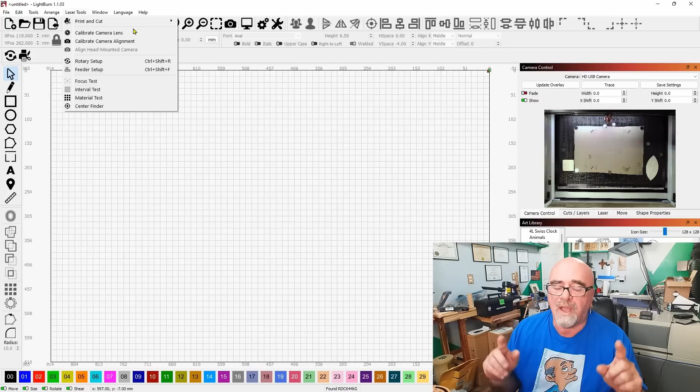So now I've started off by coming over here to Laser Tools and calibrating the camera lens. That was the first thing that I did, was the lens calibration. Now that's the one where I was saying is key. You're going to print out that 8.5 by 11 black dots during this process, and it's key to use a white background.

Make sure your entire bed is covered in white, because I've never had the calibration process for the lens go this smoothly before, where every single number was far below the minimum threshold for Lightburn to recognize it. It was done in maybe 2 minutes, because every time I hit next and capture, it would say perfect, next. I blew right through that.

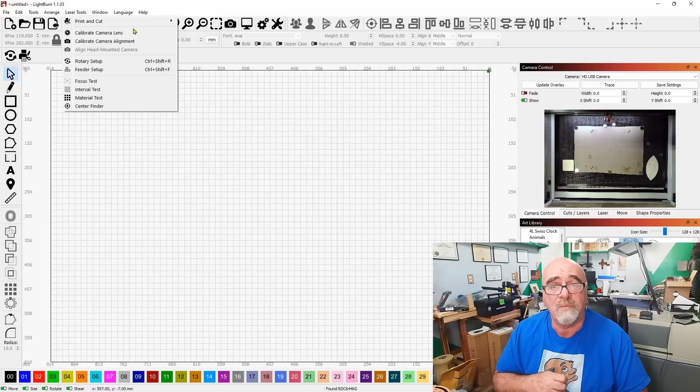That's never happened before. So I'm pretty sure that white background is the key, because I'm using the same camera as I did on my last laser, the 50 watt. I just installed that one into the 80 watt, so I know it's not the camera. And another thing, I don't like the fisheye, so I didn't get the fisheye lens for my camera. You'll see in a minute.

So the second thing that you do is you calibrate the alignment, where you burn the numbers 1, 2, 3, and 4 in the crosshairs, and then you click on the spot in the crosshairs. So that's done too, and you can see by the camera over here that I've already done that 1, 2, 3, 4, and I've done some other testing too, which I'm going to repeat to show you.

And this is where I was so impressed, and what made me decide to make this video is the accuracy. So let's update the overlay.

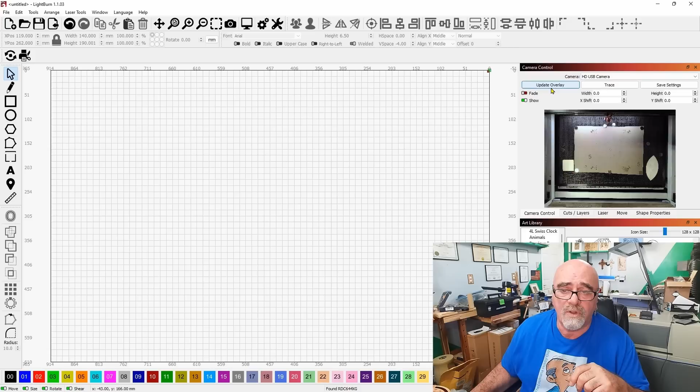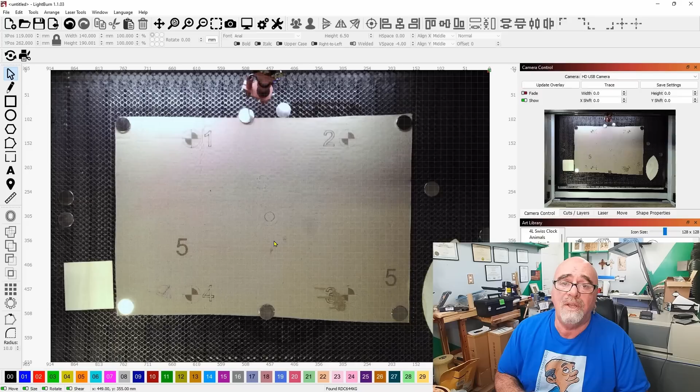Oh, there we go. You'll see on the bed, this is what I printed 1, 2, 3, and 4 at 200% size. I never even saw that option before. This piece of cardboard is 24 by 17, so you can see that's spaced pretty far apart. I think that's probably key here, making a larger image, expanding it out across the workbed.

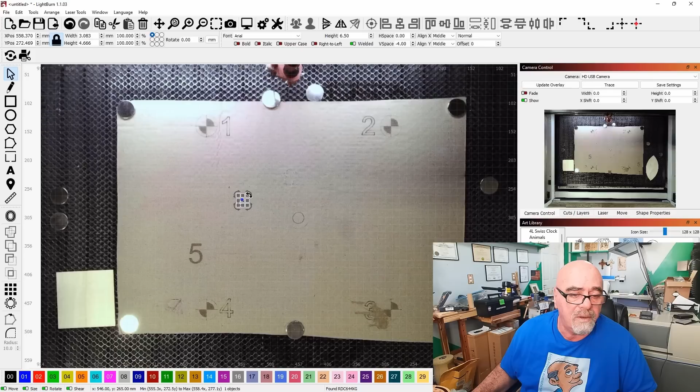So let me show you what I did. I'm going to do it for you live, okay? You see this number 5? That's what I did. I clicked on the screen and typed the number 5. Then we'll just make it a little bigger so we can see it, and I'm going to make this one really big because it can be hard to see.

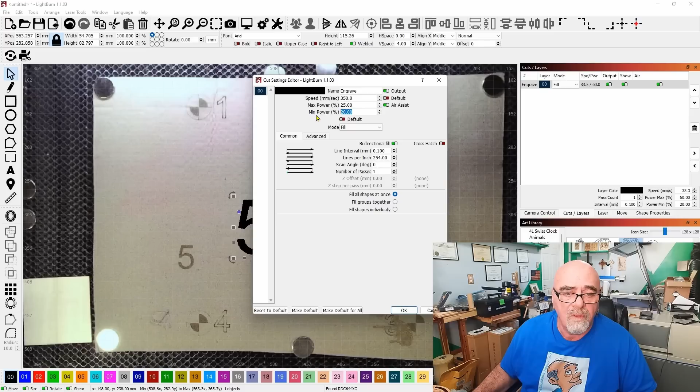Let's put it on the black layer, and let's go ahead and put this into fill mode like that. Let's see, I think we'll go 350 millimeters a second, and we'll put the max power at say 25, and the minimum power at 8. So, there we go, that's all set to go.

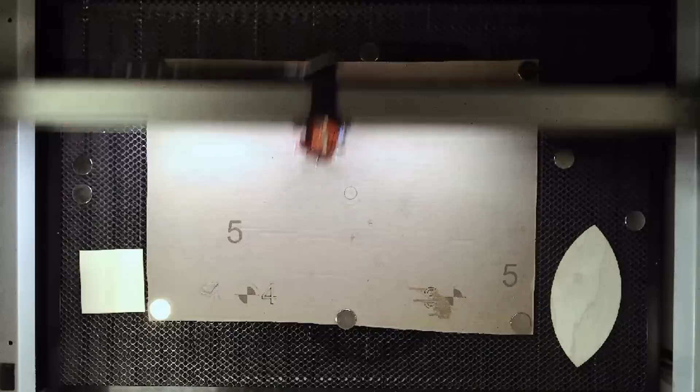Now what I'm going to do is bring this camera out, because this is just an overlay that you see here. I'll make it a little bit bigger like that. I'm going to come to the laser and hit frame, and you can see it's relatively in the spot that I picked, okay?

So let me turn on the laser, and let's go ahead and hit start. I'm going to do this whole thing in live time for you so that you can actually see this. Now when this gets finished, we're going to update the overlay again, and you're going to understand what I'm talking about here. Maybe I shouldn't have made it so big.

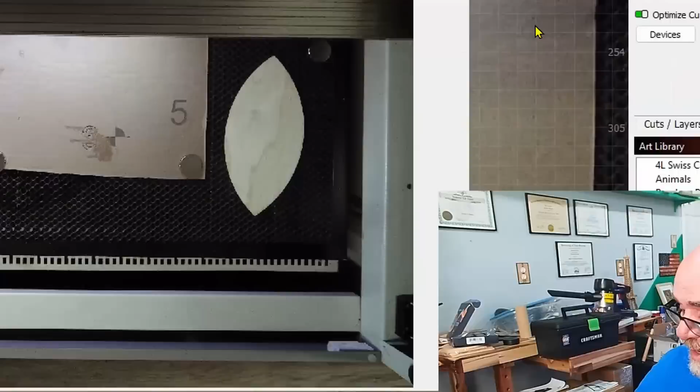Oh, and for those of you that are interested, I did finish the compass, and I don't know if you can see it here, but it came out just beautiful. If you haven't seen the compass video, you should take a look at it, it's awesome. This is four layers thick, it's got pretty heavy, and this is Baltic birch plywood, so it came out awesome. I used a triple coat for the finish, I decided to put a high shine, high gloss finish on it, so I used the triple coat.

And I probably should have made that number smaller, because this will take a little while. I'll tell you what, I'm just going to stay in live time, speed this up, and then come back down to real time.

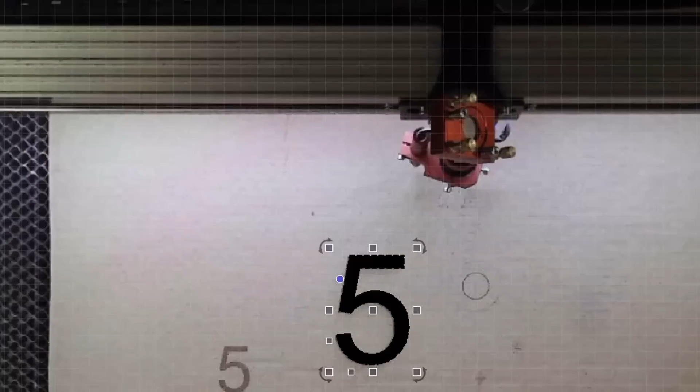Alright, so we're back in real time, and I'm going to move this camera out of the way. What I'm going to do now is update the overlay to get the latest picture of it. And there we go, so now if I zoom in...

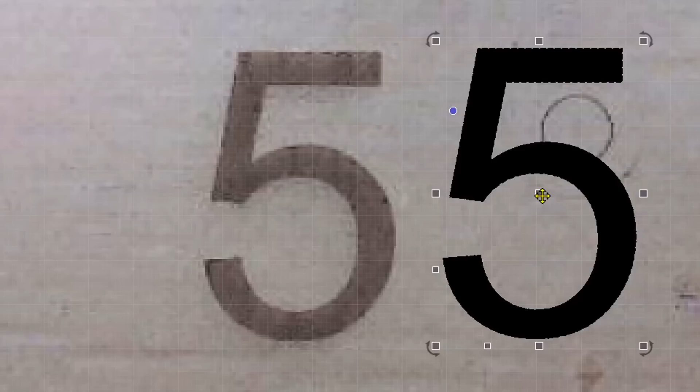Look at that. That number is exactly where I put it. Watch what happens when I pull it off. There's the burn, this is the graphic. There's the burn. Undo that, and you see that it is in the exact spot that I chose. That's pretty incredible, because that's right down to accuracy of about 0.5 millimeter.

So let's take it another step further, and I am going to do something different. Let me go put a piece of material on there and show you a different way.

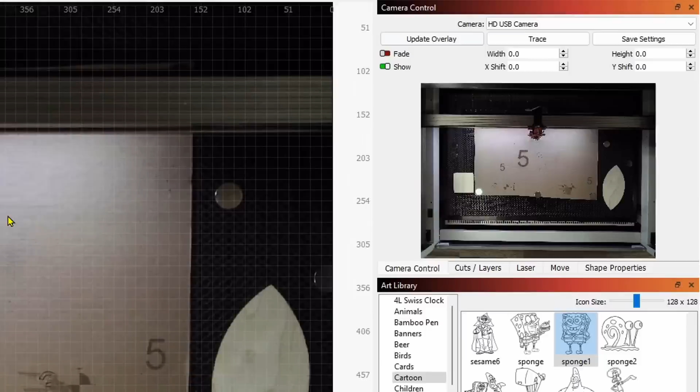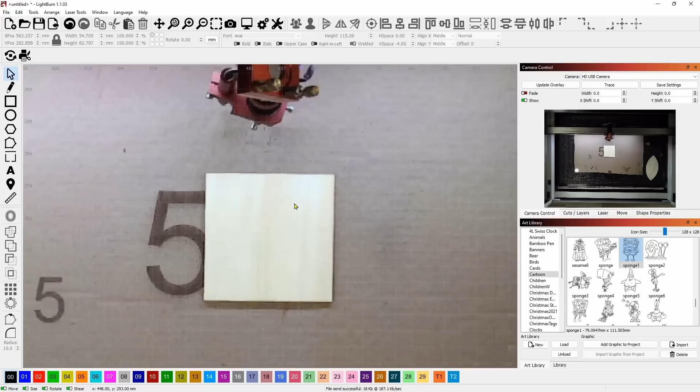Okay, now we've got our material on there. Let's update the overlay again, and you can see it now. Let's zoom way in here, and there's our piece of wood.

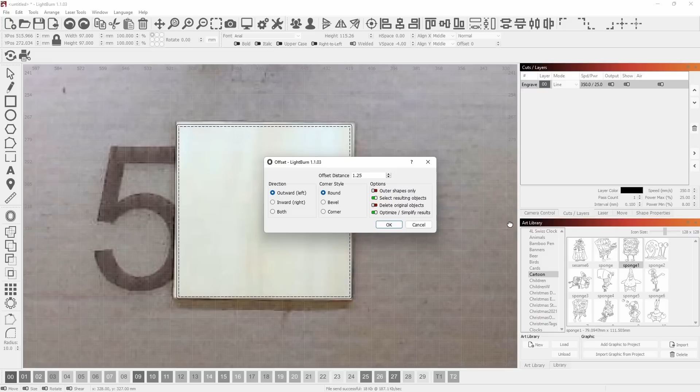Now let's take and draw a rectangle over that piece of wood. Let's put that into line mode, like that. Grab it and try and get it in the right spot, something like that. Let's offset it so that we could see it a little bit better. Say okay, put it into fill. Actually, let's put it into offset fill so it does this quickly.

And it looks a little bit crooked, the wood, so you see I don't have the wood placed perfectly. So let's grab the little handle here and see if we can make it as straight as possible. Oh, I'm only—I gotta grab both of these. Let's just group them. There we go.

All right, let's see how straight we can make this. I think that's pretty straight right there. Let's bring it in just a tad, and it looks a little higher on the top than the bottom. So let's do it this way instead. Let's do that, let's do that. And it needs to tilt just a little bit there. I think that's good like that.

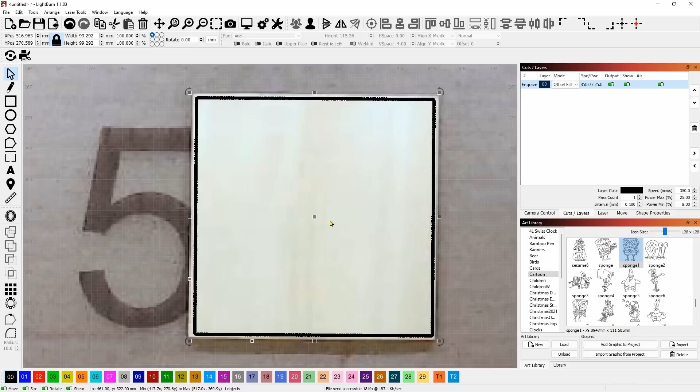So what do you think? That looks pretty darn close if you ask me. All right, let's go offset fill, 350. Yeah, all of that looks okay.

So we're just gonna come to the laser tab and we're gonna hit start. And if we come back, you'll see it running the job. This one should be a lot quicker because we're using the offset fill. That's halfway point—when it reverses direction, you're at the halfway point.

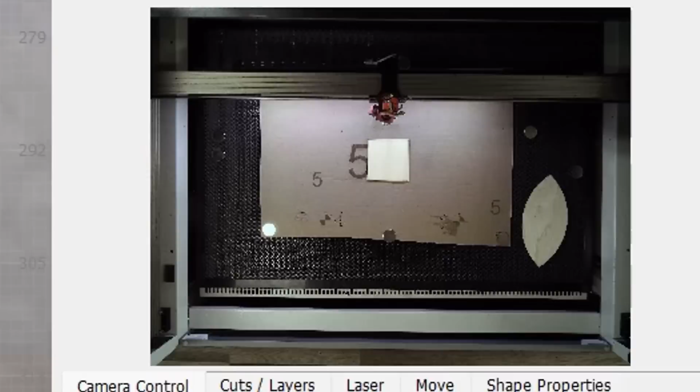This is really great if you're a distance from your laser. So now we'll hit update overlay, and you can see that it's slightly off. Not by much. Let me grab this guy, pull it out of the way. So you see I was slightly off, but we can adjust for that.

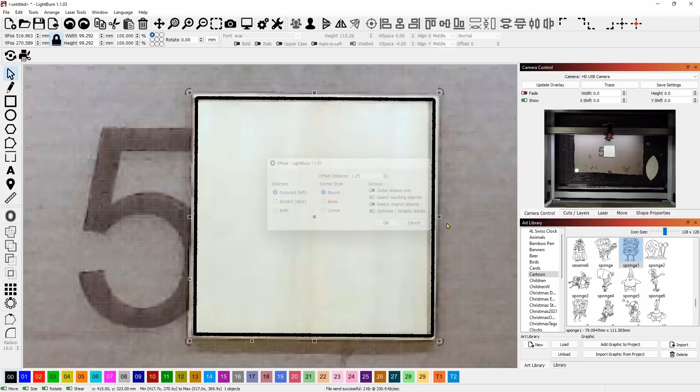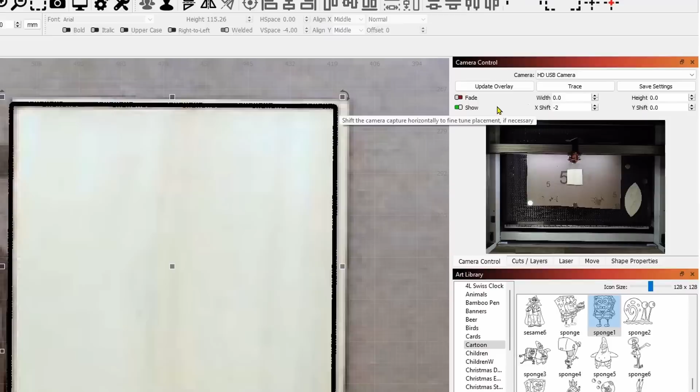So now the thing to do would be to adjust to this burn right here. How big was the offset? 1.25 millimeters was the offset. So looks like we have to shift. We're going to do an X shift by... oops, wrong way, -2. I'm going to do an X shift by -2. And I think that's probably as close to perfect as you can get.

Let's pull it off, put it back on. Yeah, I think that's it. And I think that's all we have to do.

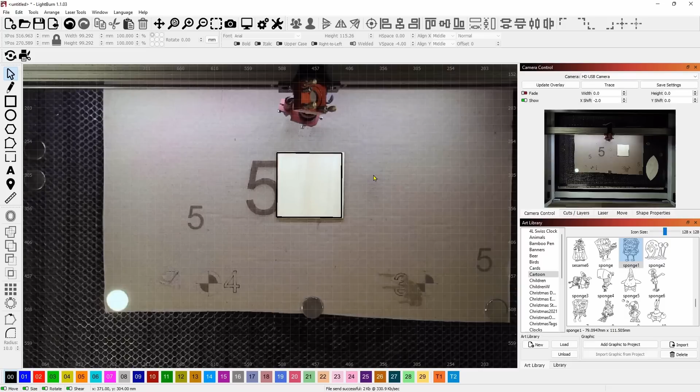So we're going to test this one more time now in a different spot on the bed here. I'm going to go move the workpiece again, and we're going to try this one more time. So let's update our overlay, and you can see that I've moved over there.

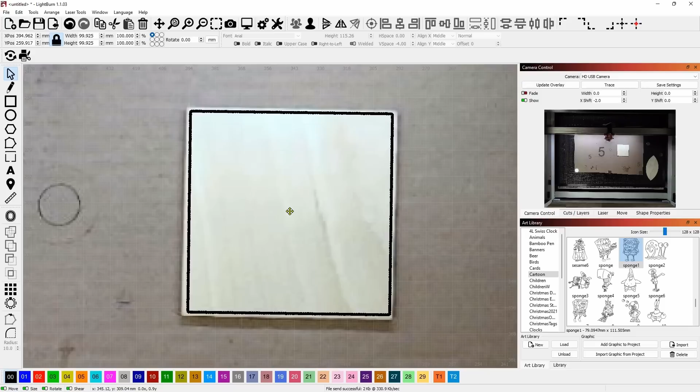So let's grab our square, put it over the wood, and we do need to tilt it again just a little bit. I don't think I'll ever get this tilt quite right. But let's try this again. So let's come to the laser and hit start.

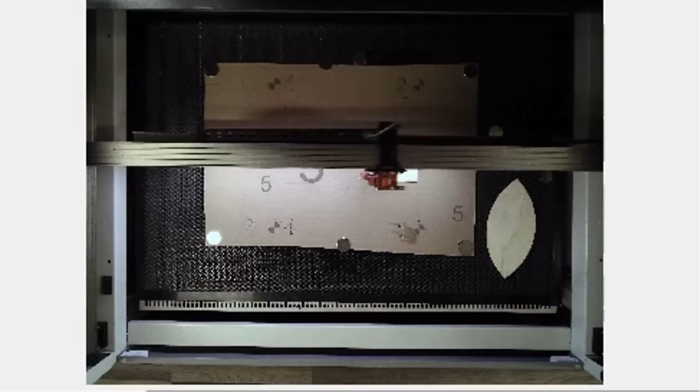And this is the dialing in. It was just so close on that first setup. I've never seen it that close before, where you're within a millimeter or so of what it should be. And we're going to find out in a second just how far off we are.

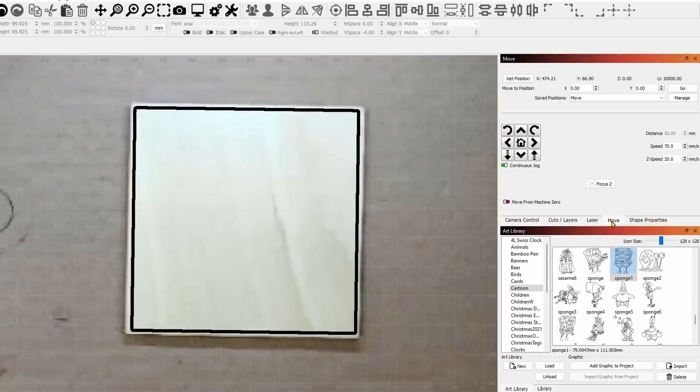All right, let me just move that out of the way a little bit, and we will update the overlay. And look at that. Now, what have we got now? One adjustment is all we made, and that is perfectly aligned. Perfectly aligned, you see that? There's the burn, this is the graphic.

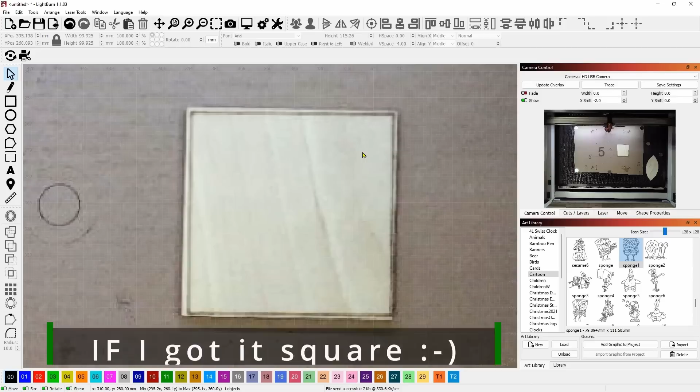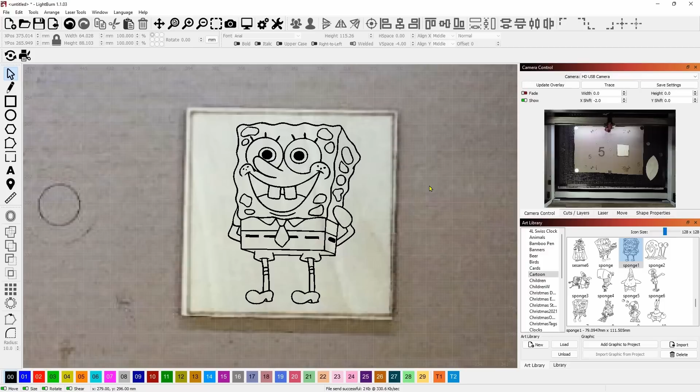Now, just for fun, let's go ahead and throw something on there. How about SpongeBob? We'll throw SpongeBob on there and see how well this comes out. So let's get him aligned. Bring him up here, and we'll align his noggin to the top like that, so it's even across. And then take and put him right about there. Let's see how this comes out.

So I'm going to run back to settings, back to cuts and layers again. Yeah, I think everything's okay just the way it is. We'll just come to the laser and hit start. And there we go.

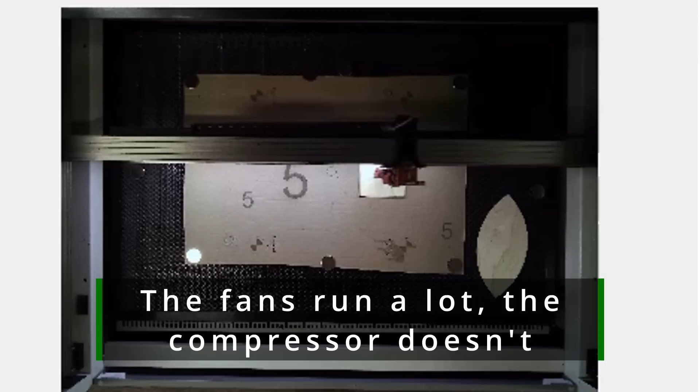And you heard my chiller just kick in. The chiller doesn't run very often, but when it does, it runs for a long time, it seems. But I like the chillers so much better than the bucket of water. The bucket of water is okay, but you're going to contaminate the water every time you put a frozen item in there. It's going to get contaminated by your hands, by your freezer, and everything else, so I don't particularly want to do that. I did do that test with the ice maker, and that worked fine. I ran it that way for a month, and it worked fine every time. But I like this closed system much better. I'm worried about contaminants in the water.

Another thing I want you to notice too is that I always run at slow speeds and low powers. I cut 5mm wood at 9 milliamps. So I try and keep my laser with the lowest amount of milliamps possible. This particular burn right here is running at about 1 milliamp.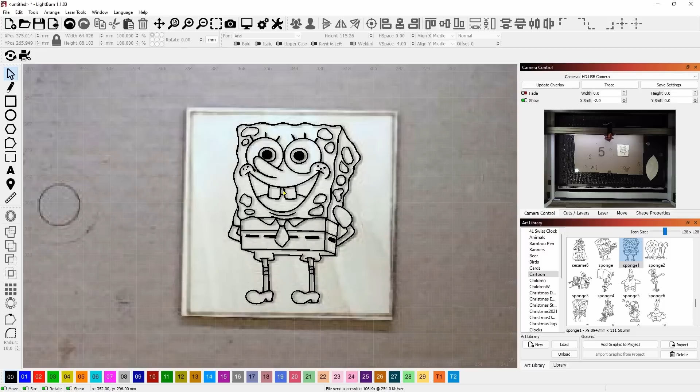All right, there we go. So let's update our overlay. And there we have it. Let's select SpongeBob, pull him off, hit undo. Looks pretty perfect to me. And this is what I'm talking about.

So now here's what I'm going to show you exactly what I was talking about. Let's delete SpongeBob, and let's add something to it really quickly. I want to see if I could find something small and easy. How about a bird? I thought I had a little bird in here. There it is, Tweety Bird. So let's take Tweety, and now you've decided that you want something along with SpongeBob there, so you get Tweety Bird. Let's go to the laser tab and hit start.

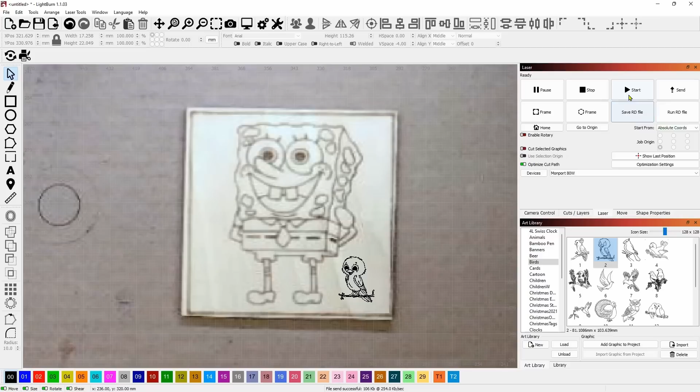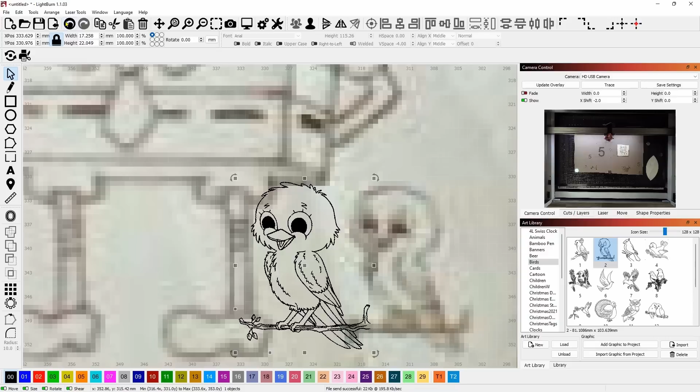All right, and Tweety is done. So let's select Tweety, let's update the overlay, move him off. And you can see he's right there. Now it does look like it's a little bit off with the camera, and it may be, since this is so small, that it's off by 0.5 millimeters or so. But I'm going to go and pick up that wood now and show it to you.

On camera, all right, so with the noise level manageable - it gets pretty noisy in here with everything on - let's recap everything. Let me show you the final burn here. And I did notice when I was rewatching the video doing the editing that I got the square off a little bit, that's why it's not lined up perfectly. If I were to do this again and zoom way in and make sure that I was tilting it just right, this would have came out perfect.

But you can see what I mean about the size of the Tweety bird. Getting it that close, it was within about 0.5 millimeters or so. This is why I love the LightBurn camera - I can go back and add things to projects after I've taken them off the workbed. So if I decide it needed a little more accent here or there, this is the reason why I so much love using the camera when I'm using the laser.

Let's recap though. The most important thing is the installation. You want to make sure that camera is installed permanently. So what I did was I got it into a spot where I thought was right. I looked at the picture on the screen and said, that's about the area that I want to capture, which is the entire bed. And once I had it lined up and square, I got my hot glue gun out.